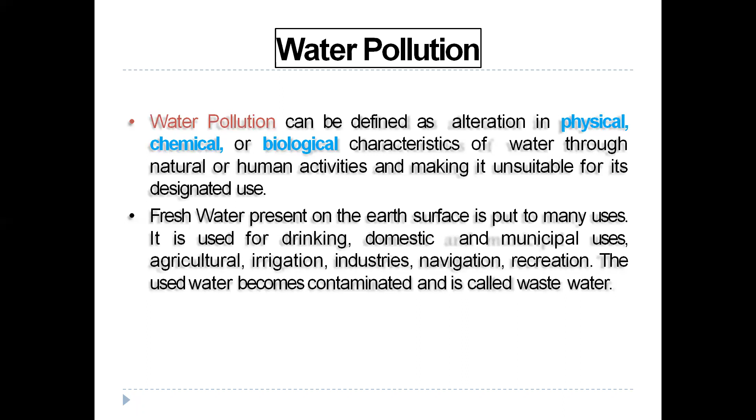Clear? Next, water quality standards. Water quality standards are nothing but, for the usage of water, different types of standards are there. First, color: water should have no color, it's transparent. The color test uses the platinum cobalt scale, and in this scale it should not exceed 20. The scale has digits, no units; the value is 20.

Taste and odor. Polluted water has different types of taste and odor. The threshold number should not be more than 3, etc. That is one type of test for taste and odor. And also temperature should be balanced; it should not exceed 25 degrees centigrade. These are mainly in water quality standards.

And also turbidity. Turbidity means dirt particles; it should be within 5 to 10 ppm. And also chlorides, dissolved gases, hardness, pH values, organic and inorganic compounds, and total solids. These follow an index of properties within a range. Chlorides should not exceed 250 mg per liter. These elements, like chlorides, dissolved gases, oxygen, or pH values, are tested in the laboratory.

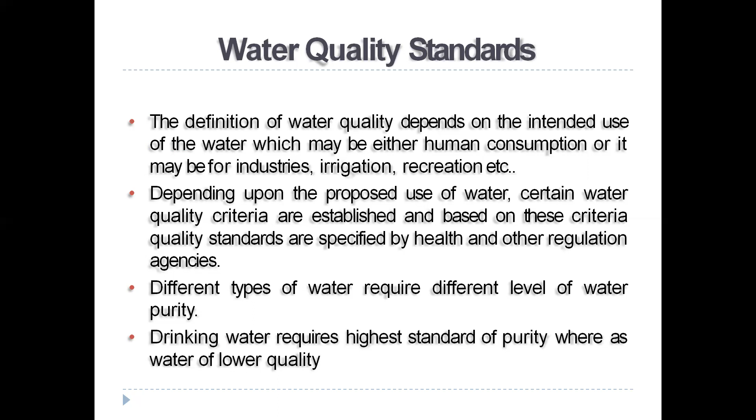Next, quality of water. Quality of water is nothing but the parameters of water which are required to test for determining the quality of water. Clear? These parameters are used to test whether water has quality or not. What are the tests? Physical parameters, chemical parameters, and microbiological or bacteriological parameters. Clear?

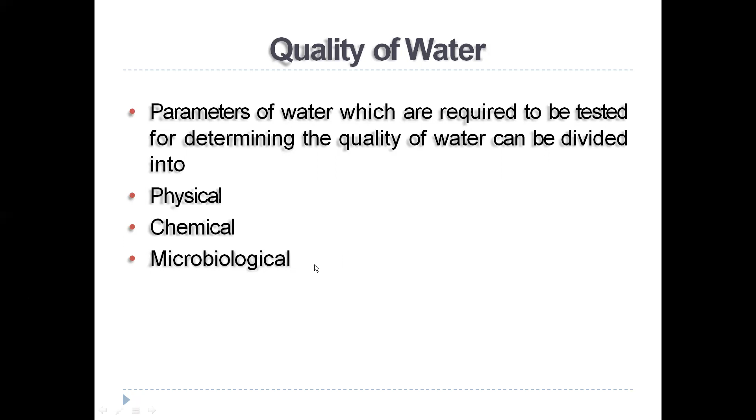First one is physical parameters. As already discussed, physical parameters are color, taste and odor, turbidity, and mainly temperature. These are the main parameters of water quality. Clear?

Color. Color is undesirable in water, and this type of water is injurious to human health. And also when this type of water is used for domestic purposes like washing clothes, the quality of clothes or shirts is reduced.

Clear? The color in water is measured by an instrument called a tintometer. Clear? The intensity of color is measured on a cobalt scale; in laboratories, the color test is measured on a cobalt scale by comparing the two sides.

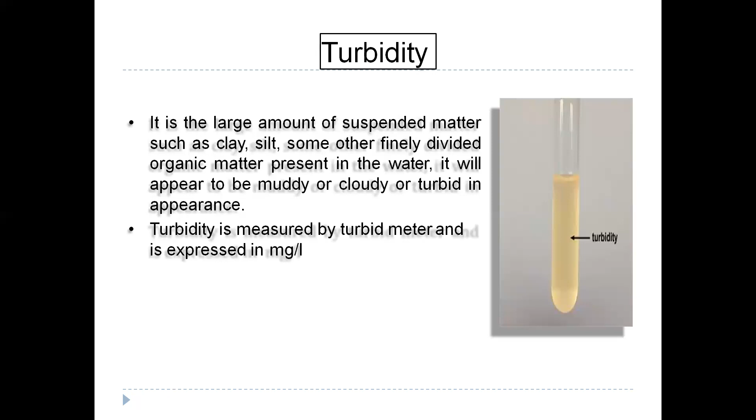Next is temperature, relevant particularly in water treatment. The sample of water should be collected at a temperature below 15 degrees centigrade. Temperature is observed by a thermometer, which records the atmospheric temperature. The temperature of potable water should be between 10 degrees centigrade and 25 degrees centigrade.

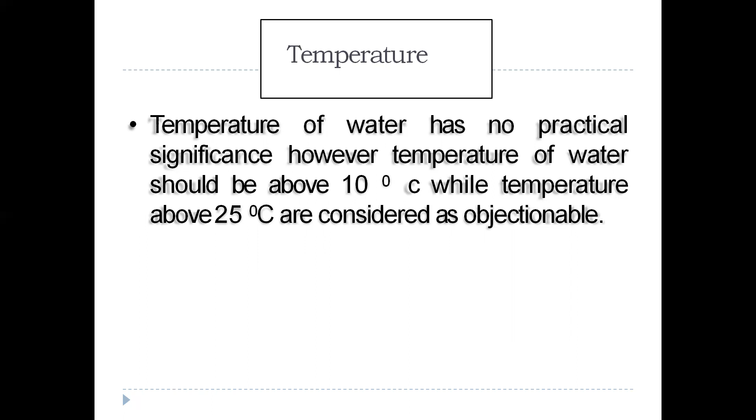Next are the chemical parameters, which include pH value, hardness, chlorides, nitrogen and its compounds, and alkalinity. These are the parameters that determine whether water is of good quality or not.

Nitrogen compounds include free ammonia and nitrates. Nitrates are detected by converting them into ammonia, and they are measured by comparing standard colors.

Chlorides: the presence of sodium chloride in excess is injurious to human health, so it should be removed or brought down to a permissible limit. For potable water, the permissible limit is 250 mg per liter, that is, 250 ppm.

Next, dissolved gases, which include oxygen, carbon dioxide, and hydrogen sulfide. For dissolved oxygen, the sample of water is exposed to the atmosphere for 4 hours at 27 degrees centigrade, using a solution of potassium permanganate at 10% concentration. The quantity of dissolved oxygen observed in potable water should be 5 to 10 ppm.

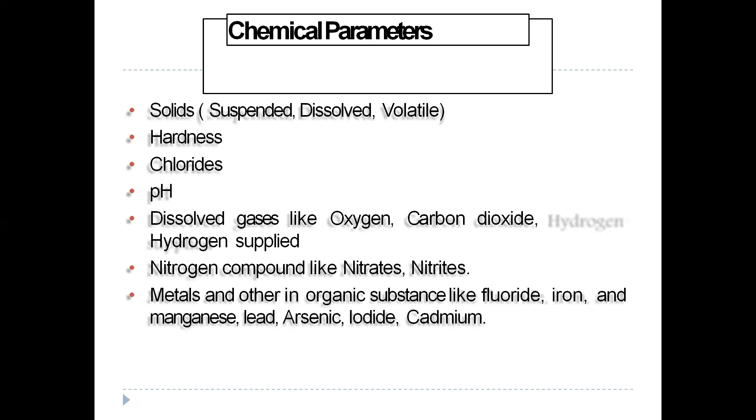Next is the bacteriological or microbiological parameter. Water always contains some bacteria, which can be detected by a microscope or other instruments used to find out whether bacteria are present. Bacteria may be of different types, namely pathogenic and non-pathogenic bacteria. Pathogenic bacteria cause waterborne diseases such as typhoid and cholera. Non-pathogenic bacteria are non-harmful. These are the parameters in water.

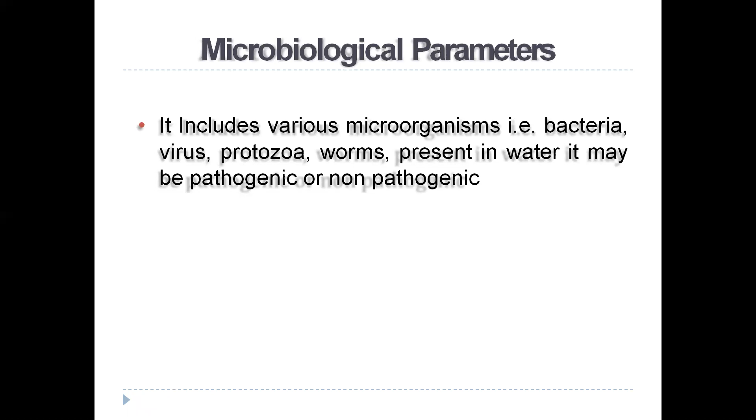Next, effects of water pollution.

Effects of water pollution: different types of materials or waste get settled on the surface or in water layers, and after settling, the water becomes polluted. Sediments are an excessive amount of soil particles carried by flowing water. When there is soil erosion, sediments clog reservoirs and channels, and this type of sediment destroys aquatic life in reservoirs and channels.

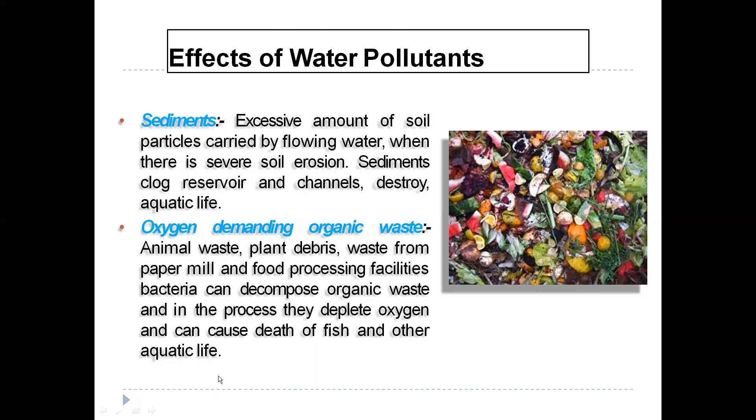Oxygen demanding organic waste includes animal waste, plant debris, and waste from paper mills and food processing facilities. Bacteria decompose this organic waste, and in the process they deplete oxygen, which can cause the death of fish and other aquatic life. When such waste, including dead animals, settles, oxygen is reduced, causing death of fish and other animals living in water.

Next, infectious microorganisms. These microorganisms are basically bacteria, either pathogenic bacteria or non-pathogenic bacteria, meaning harmful bacteria or non-harmful bacteria.

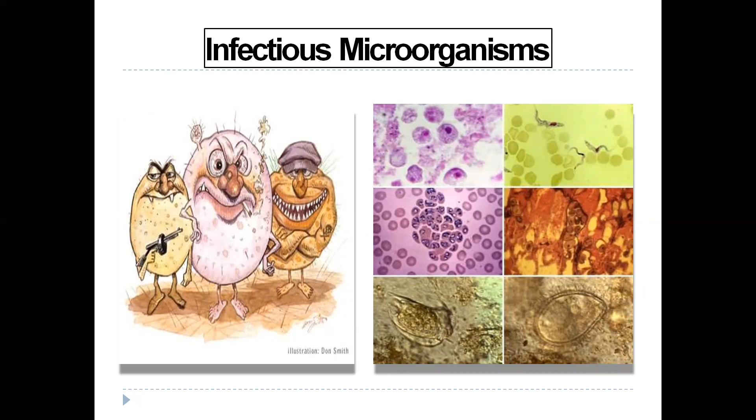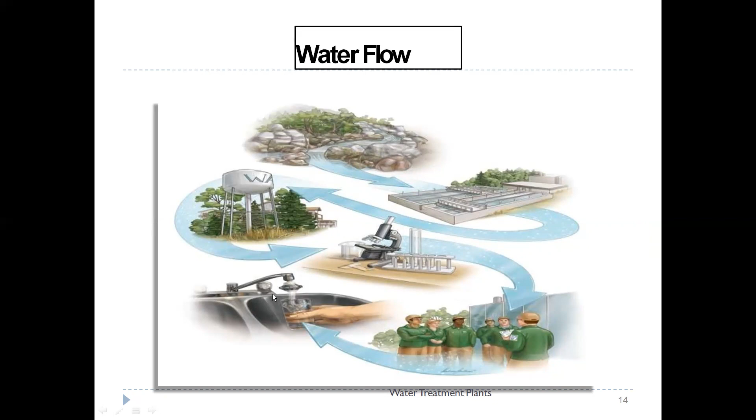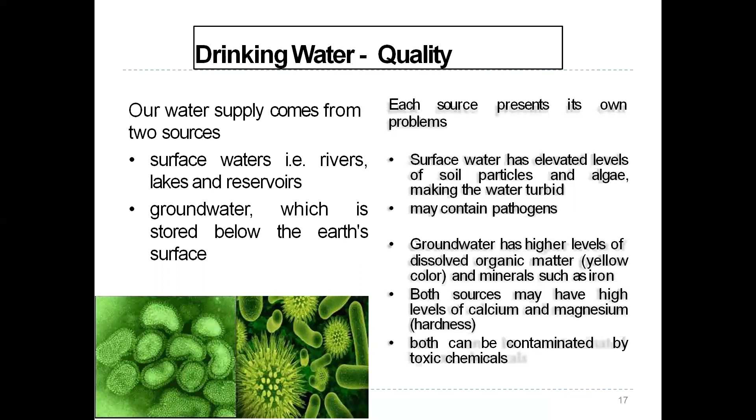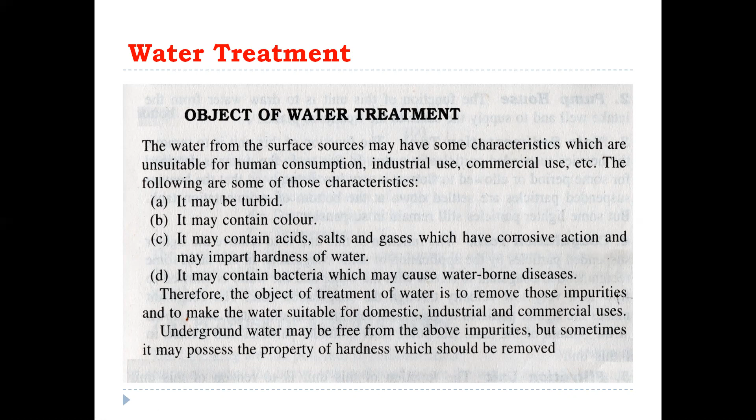When these characters are present in water, the water must and should be treated. Next is the flow diagram of the treatment plant, which is a step-by-step procedure of water treatment.

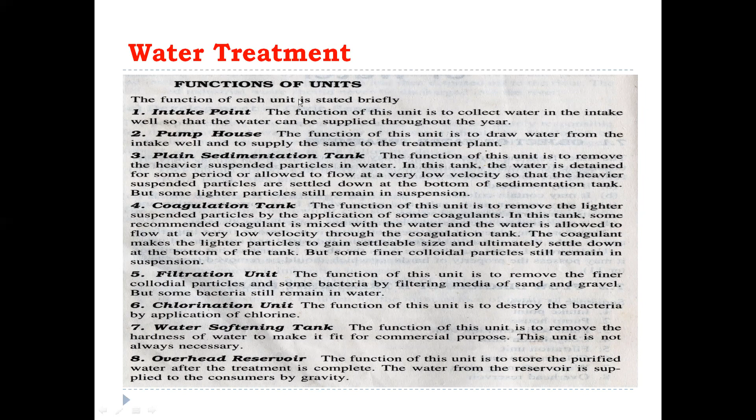Functioning of these elements: the intake point collects water in the intake well. In the image, the intake well is the river, so water is collected from the river, basically as a perennial supply, meaning it is available throughout.

Next is the pump house. The function of the pump house is to draw water from the intake well, which is the river, and supply it to the treatment plant.

Next, plain sedimentation: the total particles are settled in a tank, removing the heavier or weighted suspended particles in water. In this tank, water is detained for some period or allowed to flow at very low velocity, so during the detention period, heavier suspended particles settle at the bottom of the sedimentation tank, while some lighter particles remain in suspension, meaning in a moving position. This is the plain sedimentation tank in the process of water treatment. Next is the coagulation tank.

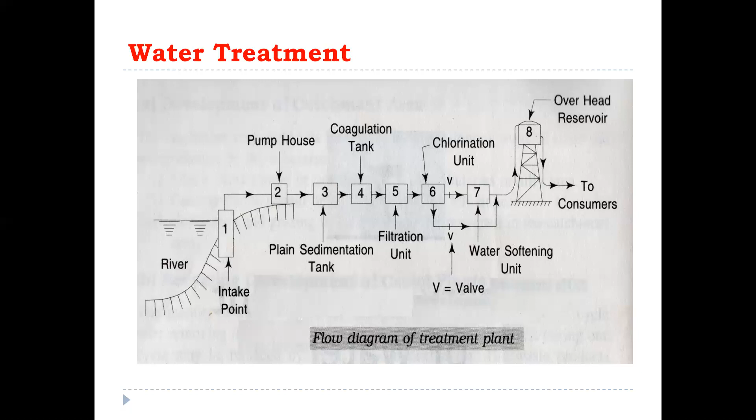What is sedimentation? Sedimentation is when water particles settle at the bottom. Particles which do not change their shape, size, and weight settle down particularly; these are discrete particles. Suspended impurities in water consist of discrete particles such as inorganic solids having a specific gravity of about 2.65.

Inorganic compounds are particles in fluids or water that do not melt and do not change shape, position, or size; their specific gravity range is about 2.65. Organic solids, such as urea and ammonia, are organic compounds with specific gravity of 1.04 to 1.20.

The phenomenon of settlement is known as hydraulic subsidence. Lighter particles cannot settle down due to the force of gravity; such particles are converted to settle by size using some coagulants in water. In this process, the velocity of flow of water, the size and shape of particles, and the viscosity of water are the parameters that determine the settlement of particular particles.

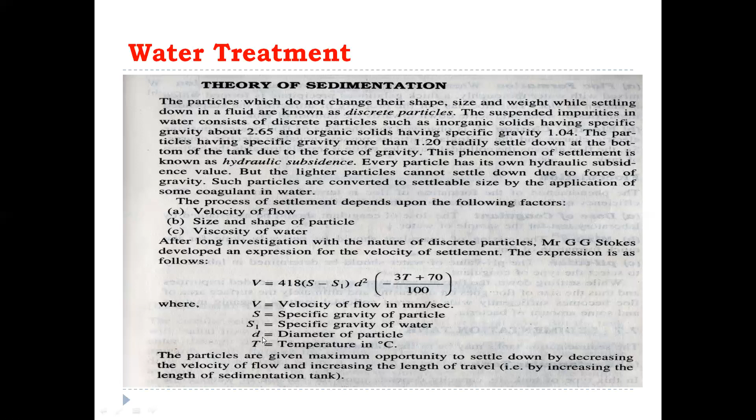There is a formula for this: V equals 418 times (S minus S1) times D squared, times (3T plus 70) over 100, where V is velocity of flow in mm per second, S is specific gravity of particles, S1 is specific gravity of water, D is diameter of particle, and T is temperature in centigrade.

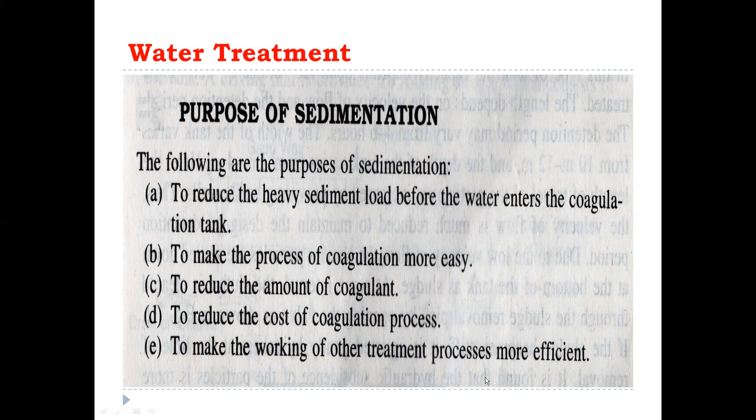Next is the purpose of sedimentation: to reduce heavy settled particles before they enter the coagulation tank or next chamber, making coagulation easier and reducing the amount of coagulants used. This reduces the cost of the coagulation process and makes the working of other treatment processes more efficient. This is the purpose of sedimentation.

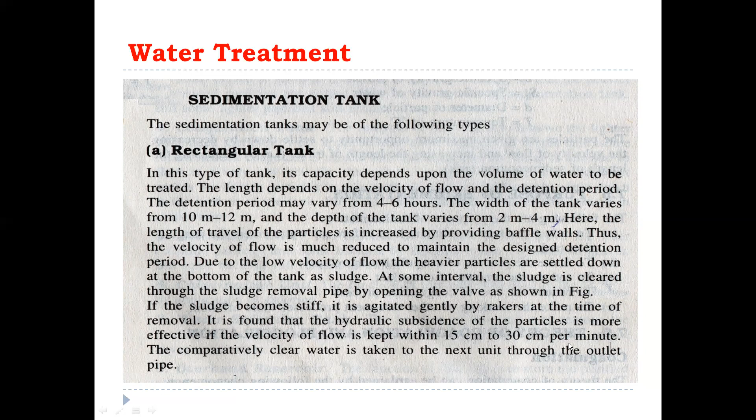Detention period is 4 to 6 hours. The width of tank is 10 to 12 meters. So this is the width of tank. And next one is the hydraulic subsidence. The particles is more. The velocity of flow kept within 15 centimeters to 30 centimeters per minute. The velocity of raw water flow is 15 to 30 centimeters.

The circular sedimentation tank has a radial or spiral flow, but the tank with radial flow is commonly adopted. In this tank, the water is allowed to enter through the inlet pipe which is provided at the center. The water flows upwards gently through the opening. The water is collected at the circular draw-off channels from where it is taken to the next unit through the outlet pipe. The sediments are settled down at the bottom of the tank.

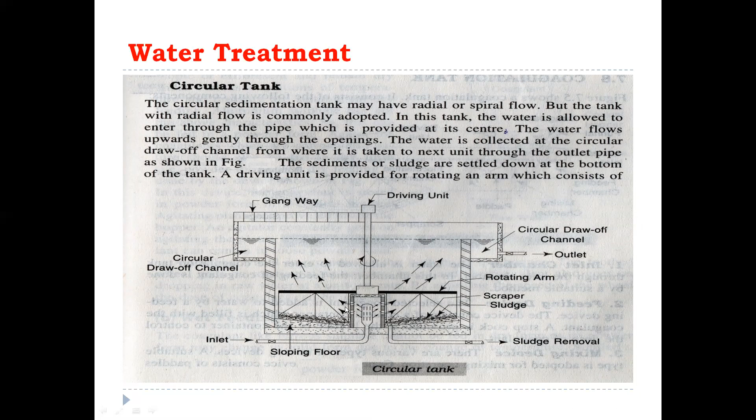The driving unit is provided for rotating arm. This one is rotating arm, which consists of a scraper, sludge scraper, nothing but removing the particles, and the circular draw-off channels. And this is the sludge. Okay, this one is screening. This is in sludge removal position.

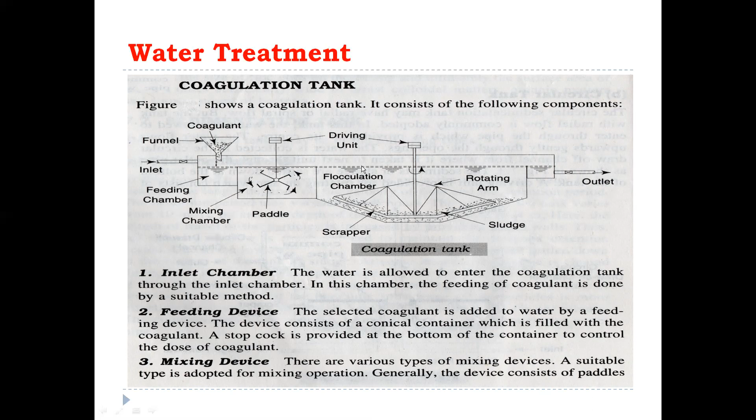Sludge removal, nothing but when coagulant is used, the small colloidal particles also get a shape and size. That is nothing but sludge removal.

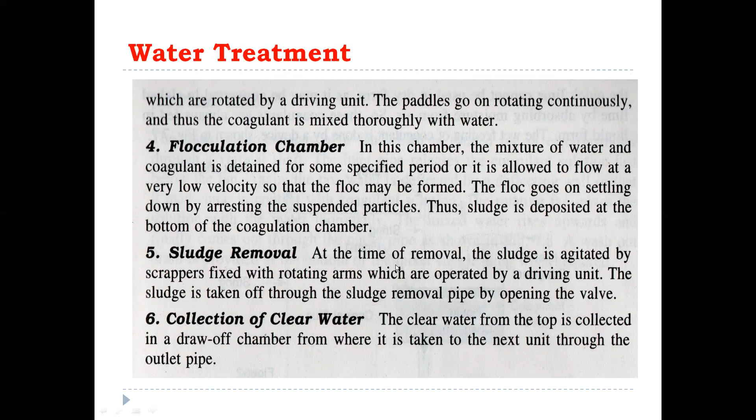Clear? The water is poured into the jars, and different quantities of coagulants are added in water for each jar. The driving unit, clear? With the help of a motor, the driving unit is started with an initial speed of about 40 rpm, rotations per minute, which is the rotation of the shaft. The paddles also rotate and the coagulants are mixed thoroughly with water. After 5 minutes, the speed of motor is reduced and continued for about 10 minutes. Then the driving unit is stopped. After completion, 30 minutes, floc formation in each jar is observed.